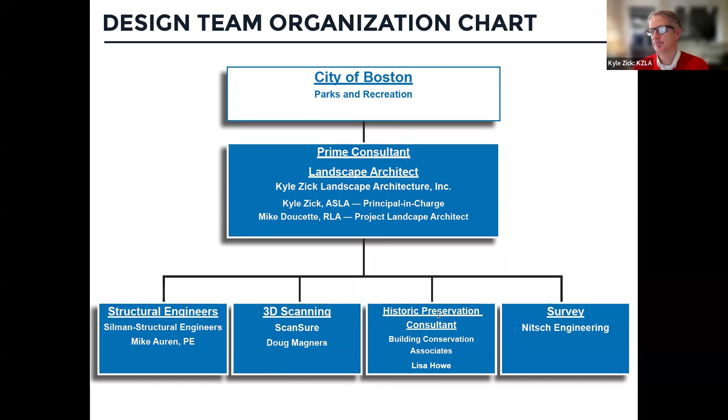So what does this project include? We were asked to analyze the existing conditions and make recommendations to improve the bear dens related to safety and stabilization of historic features. What are we trying to do tonight?

We want to summarize the safety issues that we presented in meeting 1, share recommendations for addressing those safety issues and prioritizing improvements, and share how the recommended improvements fit within the construction budget.

So we're going to use certain diagrams to describe the bear dens, and I just want to get you oriented to those. This is a plan view, just so you all know this space. Seaver Street is on the right-hand side of this image. The stairs, which would lead you up to the plaza that connects to 3 of the bear cages, are shown here. Now we're going to refer to the cages by number, and this is how the zoo actually referred to them.

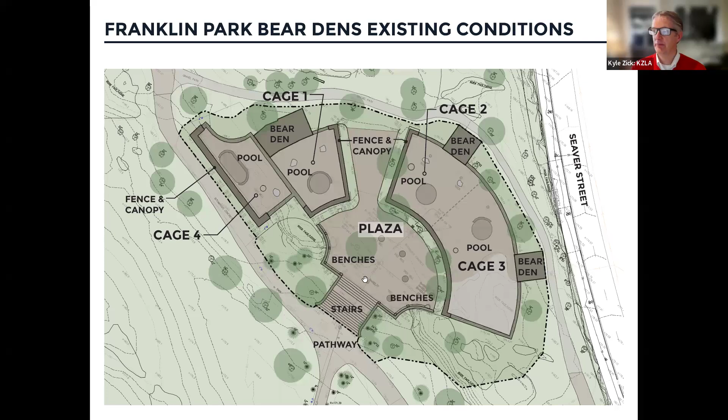So if you're at the top of the plaza, to your left is cage number 1. Then there's a gap in the cages, and you have cage 2. Cage 2 is the one that has the City of Boston logo and the bears. And then cage 3 is to the right. And then if you went back down the stairs and up the path, that's cage number 4.

We also are going to use 3-dimensional graphics in this. So same idea, but you start to see the heights and some of what these components look like. Here are the stairs, the plaza, the pool, cage number 1, where you have a pool, walls, and fencing. Cage 2 and 3 are connected, each with a pool, fencing, and walls. And then cage 4 with the fencing, the pool, and the walls. And then of course we have the stairs and the benches.

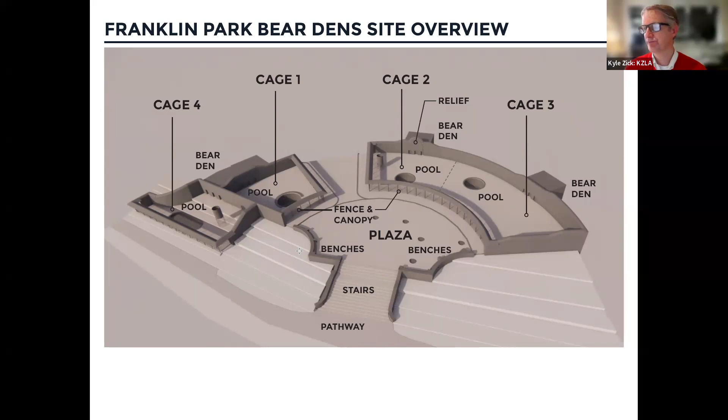Just to backtrack a little bit, and to understand where we are: this is a 1925 plan by the landscape architect Arthur Shurcliff showing expansion for the zoo, but it gives you some orientation for today. Blue Hill Ave is on the right-hand side, Seaver Street is on top, and Walnut is to the left. What you think of as the zoo today is what I'm circling now. And the bear dens are out here in Long Crouch Woods on the left-hand side of this drawing.

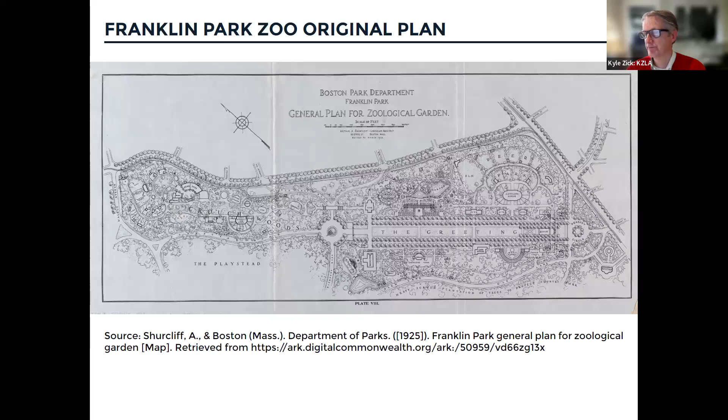As I mentioned, we're referring to the cages by cage number because the documentation is so good, we actually know what species of bear were in each cage. So brown bears in cage 1, and the photos correlate to each one of these. Cage 2 had Russian brown bears, cage 3 had black bears, and cage 4 had polar bears.

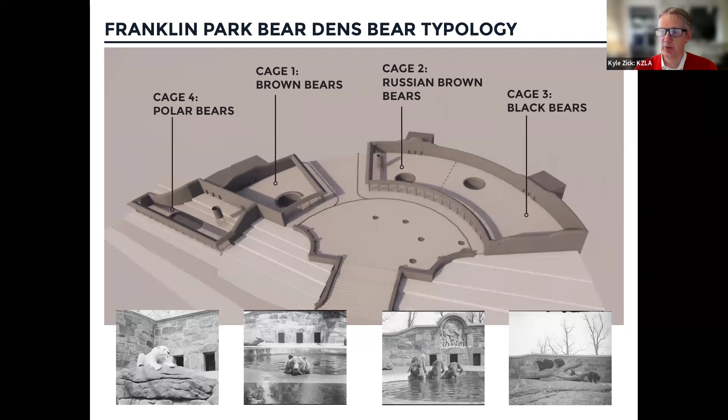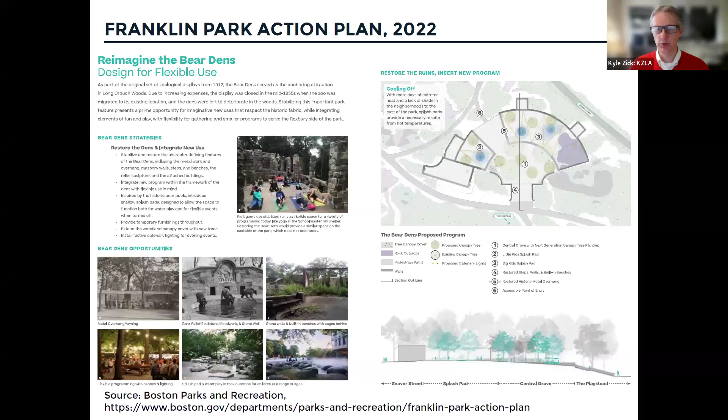The Franklin Park Action Plan definitely had recommendations for the bear dens and envisioned flexible use and new programming. None of this changes with our project. Our project is just making it safe in the interim, and anything we do won't preclude those future uses, which will be determined later.

We've done a fairly thorough site inventory with our landscape architects, structural engineer, and preservation consultants. So we've looked at pavement, stairs, seat walls, fences, masonry walls, vegetation—all these things—to make sure we have a comprehensive understanding of the bear dens and what all the safety issues are.

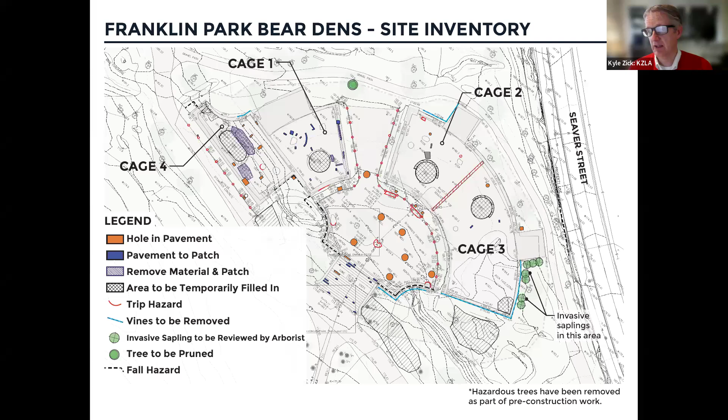And what are those? Each one of the bear dens has a pool that used to be full of water, but now is a fall hazard. There are holes in the concrete pavement in each one of the exhibits that you could trip on, twist an ankle, get hurt on. The fencing used to have a steel cap on it, a ridge that was part of the security measure, but it is rusted and is not secure in all the places. There are old utility structures that have no covers that are a fall hazard, and there are tripping hazards from raised elements that are in the exhibits.

And then there are stabilization issues too. They're not necessarily safety issues now, but we don't want these issues to get worse. So in cage 4, you have a place where the concrete cap of the wall meets the metal cap of the wall, and right at that spot, which this photo in the upper right highlights, is where water gets in, and then that water gets into the wall and you start to see this kind of cracking. In addition to this issue, we suspect that the left-hand side of this wall is resting on ledge, pudding stone, and the right-hand side is not, so that's accentuating some of that settlement.

Then at each one of the exhibit spaces, we have a cap with these metal bayonets—that's how they referred to them in the historic drawings. But the concrete cap is degraded badly in some locations, and we don't want that to fail, one, because it'll allow more water into the wall.

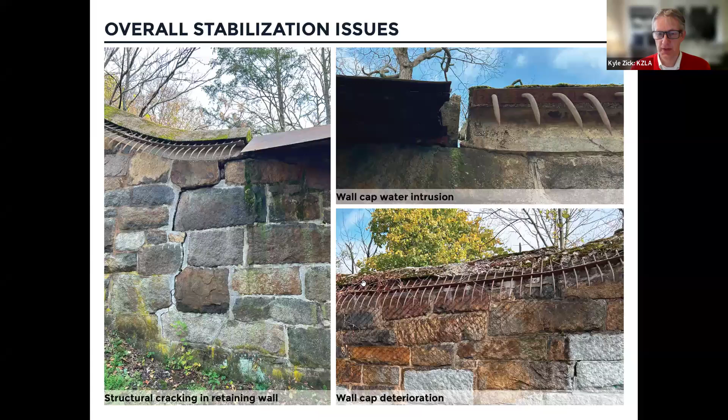And then also we may start to lose the bayonets, another historic feature. So then we're going to get specific by cage. Cage 1, if you're at the top of the stairs to your left, is cage number 1. So what are the issues? Some of these will be repetitive, but I'll point out the unique ones as well.

Here we have limited access in and out of this enclosure. If you're a visitor, you come through the opening here, or maybe through what was an old gate, but you could feel trapped if someone came behind you. There's a small opening where these people are in the photo, but there's a comfort level issue here. We also have a fall hazard with the old pool.

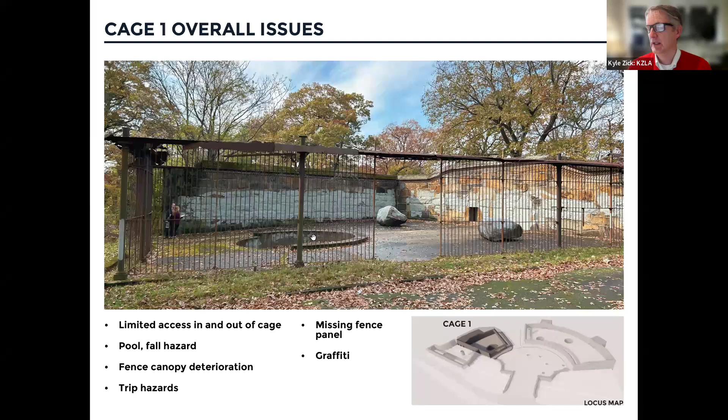The fence cap has a lot of deterioration, and sheet metal and plate metal is falling. There are tripping hazards in the pavement and around the curb, and fence posts that were cut off but stick up that are an issue. Then there are missing fence panels — I've talked about the access, but the fact that this is missing, and the gates are missing, is a concern. And then there's graffiti and covering up of the graffiti that we've looked at.

So then we'll look at this in 3 dimensions, and we've color coded this with 3 colors deliberately to explain if there are safety issues, stabilization issues, and what would fit into the budget we have. So we're still at cage 1. As I pointed out, there's one way into the space now, which is this missing panel, and then there's the missing gates. The light blue are priority 1 improvements to make things safe.

So everything in this light blue, these labels in the light blue boxes and what's highlighted in the drawing — I'll go through these starting on the right and move to the left, then we'll go to priority 2 and priority 3. Some of the things we're concerned about from a safety perspective are the stability of that metal cap.

That metal cap is rusting and falling off, so we can remove what's loose or replace it. These fence post bases that have been cut off above ground, which you could trip on or fall on, we can cut flush with the concrete. We can fill the concrete utility vault that you could fall into, and we can repair the missing or loose stones in that bench so no one falls down onto the ledge.

There's a curb here that has protruding steel reinforcing — that is a concern. And then I think we would like to remove one of the fence panels so you have more than one way in or out of this space. We would temporarily fill the pool with gravel so there's no fall hazard, but that gravel could be removed later if it were determined there was another use for that pool. So those are the safety issues.

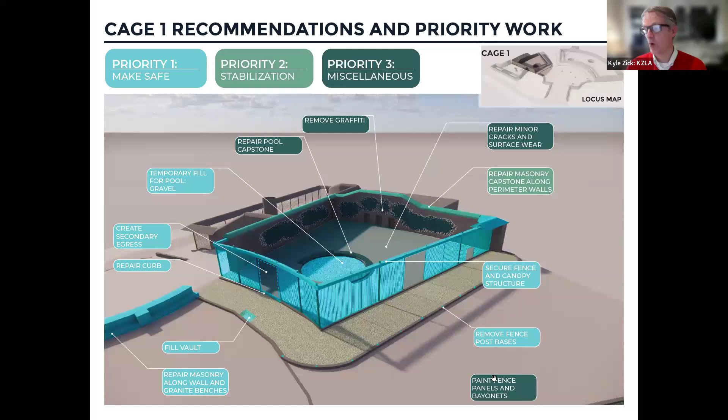So then we shift to cage 2. To orient yourself, here's the City of Boston logo with the bears, directly ahead of you as you come up the stairs. So what's different or unique? What issues are unique at cage 2 versus cage 1?

There's the curb dividing between cage 2 and 3 that's raised, and some of it's loose, so that's a tripping hazard. We have a tree cage that protected a live tree in the bear exhibit that's loose, and there's actually a hole in the fence you can get in through. We also have multiple holes in the pavement that are tripping hazards.

And there are some other things common to cage number 1 as well — the failing fence canopy, graffiti, the remnant fence posts out here, and the utility structures that you could fall into, as well as the pool.

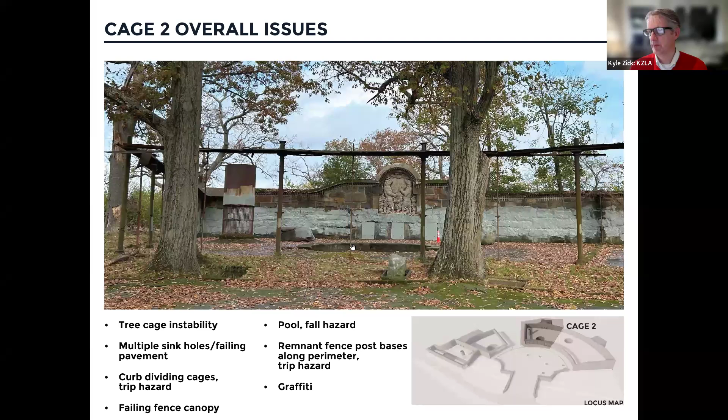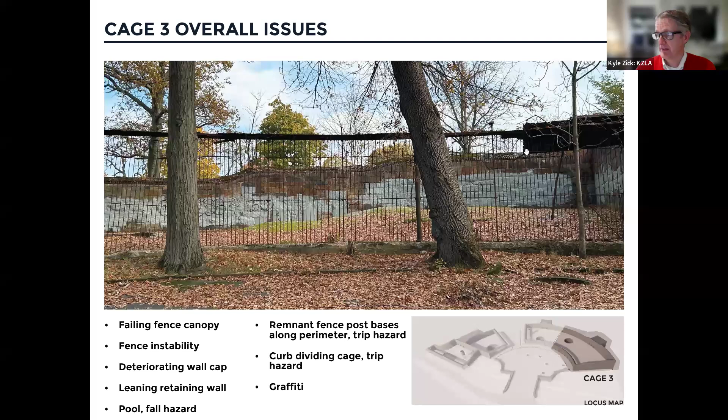As we shift right to cage 3, which is connected to cage 2, highlighted here in this locus map, you have a lot of the same issues: the failing fence canopy and graffiti, the curb dividing the cages, the remnant fence posts out here, and the fall hazard into the pool. What's unique is that we have one fence panel that's definitely loose, some others that have connections that could be tightened, and some intact fence cap that is here, but it's loose and has some concerns.

So as we show a diagram for cage 2 and 3, it's highlighted the same way, with light blue being the make-safe priority 1, light green being priority 2 and stabilization, and the lowest priority, priority 3, being dark green. I'll start on the right-hand side. Here's cage 2 that has the Boston logo and the bears. This is the divider between cage 2 and cage 3, and the stairs are here with the benches off to the right.

There's holes in the stairs that we can repair so that's not a tripping hazard. This bench actually has a lot of issues - the masonry, the granite pieces have fallen, so that would be repaired. These circles shown in the plaza are where there used to be trees, so we would fill those in with pavement so there's no tripping hazard.

The fence posts that I mentioned at cage 1, we would also cut flush so they're not a hazard, and fill those utility vaults. The fencing has some of the same issues - we would secure or remove any of the loose fence cap, the metal, and secure that tree cage that's loose and has a hole in it. Fill each of the 2 pools with gravel, remove the raised curb between the 2 cages so that's not a tripping hazard, and then fill in the holes in the pavement.

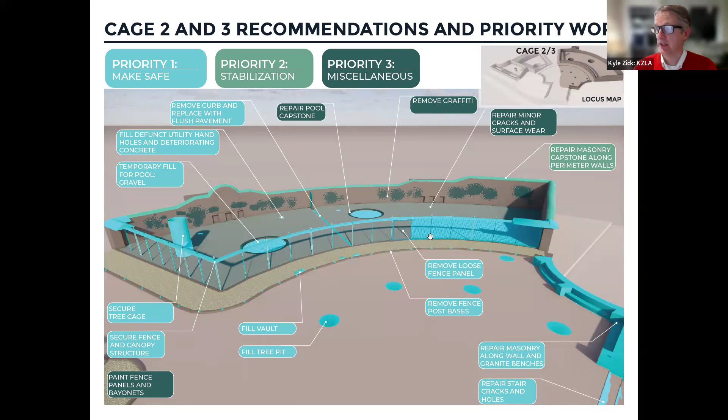The stabilization or preservation issues are again related to repairing the masonry cap on top of the wall so we can stop water intrusion and protect those bayonets, those metal spikes. Priority 3 would include repairing the capstone around the edge of those pools, removing graffiti, minor repairs in the pavement in each of the cages, and painting of any of the metal components.

So cage 4, we've shifted. If we've come down the stairs up the path, it's the cage off to the side. This is where the polar bears were. Cage 4 is a little different - one, because almost all of the fencing is intact. One panel's missing and one gate. The cap on top of the fence is intact, although there are some stability issues that can be addressed.

Inside the cage, we feel there are some unique safety issues that are more difficult to address. If we were to allow people to enter this, we're concerned about the deep pool, which we could fill, but the very steep pavement - there's really not a good solution for us to address that safety concern. There's a tree cage here that we would have to address, and there's also a lot of holes in the pavement that we would have to improve.

So what is our approach here? It's a little different than cages 1 through 3. Here, because of the unique conditions inside this cage, we feel we should replace the missing fence panel and the gate to secure this cage and not have public access. That prevents some of the safety issues, but also shows a model of what one of the intact exhibit spaces looked like, so people could understand it better. Then we don't have to fill in the pool or address some of the holes in the pavement or the steepness and fall hazard with the slippery pavement surface.

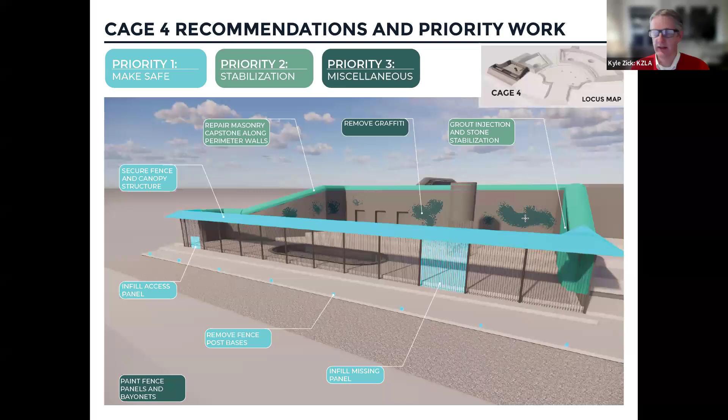We would still address the stubs of the fence posts out here and do whatever repairs were necessary to secure that intact fence cap. Then as a priority 2, again address the capstone on top of the walls, but unique to this one, we would do some stabilization with grout injection and resetting of stones where that wall has settled. And then we would actually remove the graffiti here, because without public access, we wouldn't expect more graffiti issues in the future.

I've already mentioned some of the plaza and stair issues that connect cages 1, 2, and 3, but I'll show some of the images here. Some of these circular tree pits where there are no longer trees, we will pave those so they're not a hazard. There are voids where the stair tread meets the riser that we will repair and fill in. There were actually trees growing in some of the stairs, so we'll address that grade change and tripping hazard. And I mentioned earlier where the benches are falling apart, the stones have fallen down the hill - we can put those back together and make this safe.

There's a few other issues around the site. If you were behind cage 3, Seaver Street is shown here to the right. There's a pretty good drop from the cross-country track and where maintenance vehicles come through down to the sidewalk. There's also areas you could climb out on the ledge that previously had metal posts and some kind of fencing to prevent falling down the ledge.

But along Seaver Street, we think there should be some kind of fencing, trying to make it as transparent and as light as possible. There's ledge in this area, so a steel post that we could anchor into the ledge if we encounter it, but then some thin steel cables, maybe 4 or 6, that would prevent access down the fall to the sidewalk.

So a bit of a recap showing the images of cage 1, 2, 3, and 4 all together, highlighting the different priorities. The light blue are the safety improvements, priority 1, addressing the stability of the fencing and filling in holes and fall hazards at each cage. Cage 4 is a little different where we'll secure the cage.

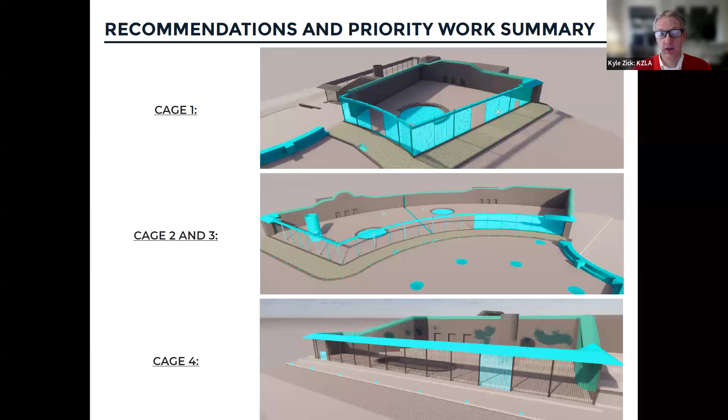The second priority is more of the masonry concerns, making sure that we cap the wall appropriately and don't allow water to get in. Then the miscellaneous improvements included some of the graffiti removal in cage 4, but also some of the invasive vegetation removal.

So how does this all get tallied up and relate to the cost estimate and our budget? All the things our design team inventoried and recommended totaled almost $1 million, which is more than the construction budget of $720,000. So that's why we were thinking about priorities and different buckets.

Make safe would have a certain amount of money. Well, let me explain it differently. So then we have to try to figure out what fits within the $720,000. We want to prioritize the things that make it safe. Those things totaled up to almost $300,000 that address the tripping hazards, the pavement repair, the stair and seat wall issues, and infilling the pools. Then when we get to the stabilization issues, the wall repairs, the wall cap, that's almost $400,000.

So then there's a little bit more money left to do some of priority 3, which would include the graffiti removal in cage 4 and some of the invasive vegetation removal. The things that wouldn't fit in this budget are above this line: graffiti removal in cages 1, 2, 3, because those are still open to the public, and we expect that will continue until there's more activation here. Also the painting of the metal fence and the bayonets, including the preparation of removing the rust on those fences. So not too much doesn't make the cut, but all the things very important to achieve the goals of the project do make the cut.

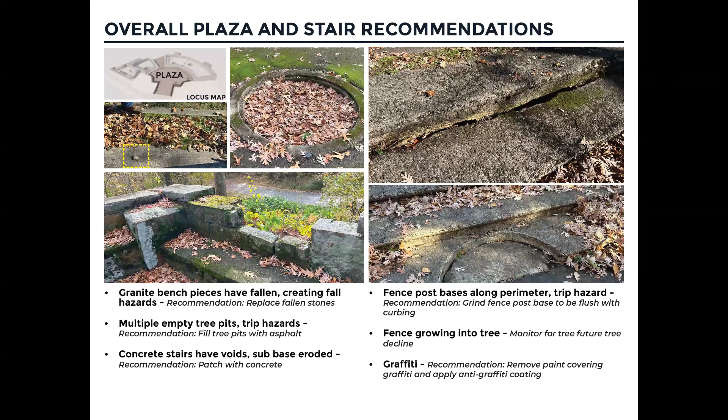Lauren had a question about a future Friends group—when it's safer, they could have volunteer days concentrating on graffiti, litter and debris removal, as well as keeping invasive plants in check. I think there's certainly great opportunities there for volunteers. The Emerald Necklace Conservancy has done some volunteer invasive removal, so that's certainly on the table. Happy to coordinate with people on that.

Christine, if you have info on what Franklin Park Coalition has done there specifically, we can connect you all.

Kevin, I see your question about the transfer of care and custody from the state. From what I'm told, it is moving along. The state is certainly happy to transfer that back to us. It's still in the city's ownership currently, but just the care and custody piece is what's being transferred. I'm optimistic that won't impact our schedule negatively, but I'll let you all know as we hear updates. It's certainly in the works, so I understand it's been a long time coming.